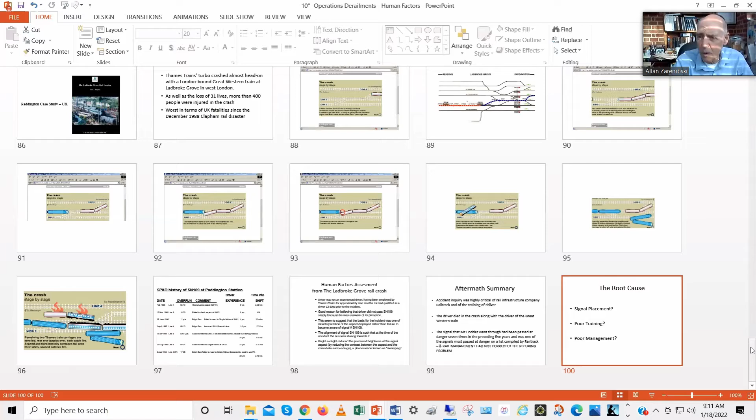Although this was a classic human factors problem, which was the driver on the cell phone, just the same, it has a well-defined engineering behavior to it.

So let's see if we can get this going. And that's what I was afraid of. For some reason, when I do it this way, it doesn't let me put a marker on here. So let me just stop sharing and come back. Huh. Oh, there it is.

Okay, so we're going to start talking about human factors type accidents. Human factors accidents include a whole slew of activities, including drug and alcohol, incapacitation due to injury or illness, literally the classic heart attack. In the metro world, we have a dead man switch, designed to act if something happens. We have alerters in the railway system, and now in the modern world we have positive train control and train control systems, which prevent some of these, but not all, depending on where and how you're working.

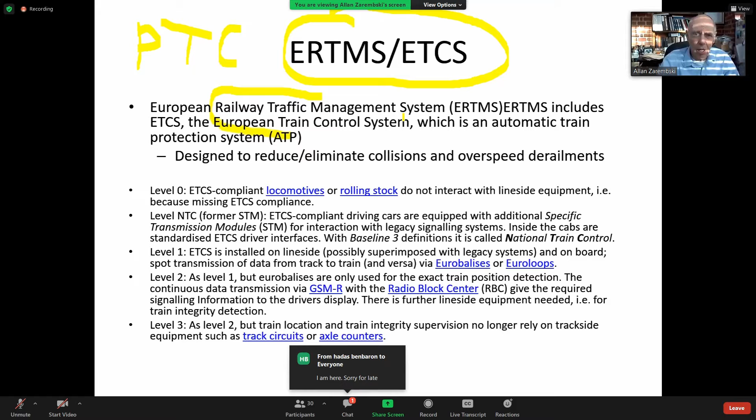In the UIC world, or at least in the European world, it's called European Rail Traffic Management System, and more specifically, the European Train Control System, the ETCS, which I believe Israel Railways is introducing into quite a few of its lines, at least at some level. And metros often have a system that's called an ATS, or an automatic train stop system, which is a little bit different technically from either a positive train control or an ETCS type of system.

But they're all designed theoretically to stop the train if the train is going too fast, if the train goes past the red signal, if there are certain clearly well-defined criteria that are exceeded. And for the most part, they work well, but they don't work 100%. Okay, just a quick refresher on ETCS.

ETCS really has multiple levels, starting with level 0, where you basically don't have any technology associated with the interface between wayside equipment and the locomotives or the locomotive drivers. And then ETCS level 1 is where you start having some line side equipment, some wayside equipment, some signaling type of systems that provide information back to the train driver and back. Usually level 2 already is where you start imposing an automatic stopping of the train.

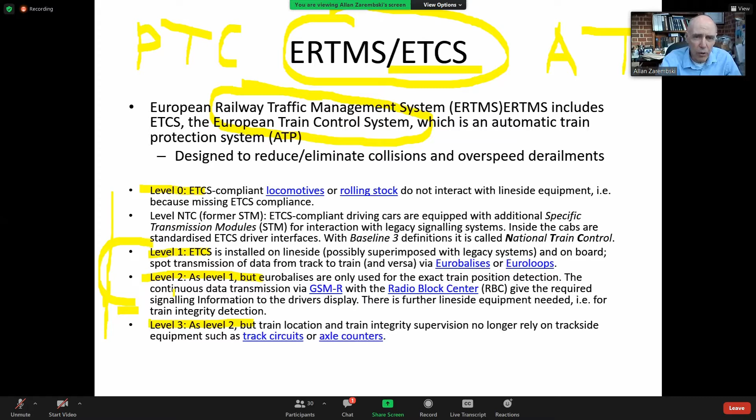Okay. So let me give you a couple of examples of some accidents. I want to sort of set the stage here to discuss some of these accidents. Now, again, some of these accidents you'll see are pre-positive train control, ETCS type technology, and some of them are post-positive train control technology. And we'll talk a little bit about the positive train control, ETCS type of technology, which is designed to stop trains from overspeed.

So, for example, the Spanish accident that we saw before, if a proper ETCS or PTC or ATS type of system was in place, it would have detected the overspeed, even though the driver wasn't paying attention, and would have automatically slowed the train or even stopped the train before it went into that curve. So that's the kind of technology that we're moving towards to get us away from the driver, because when there's a driver who's controlling the train, we know there's a potential for accidents to happen.

Okay. So this is a 2014 German accident. By the way, I've sort of culled my presentation, got rid of a lot of the American accidents and put a much larger share of European accidents in here, just so that we don't constantly point to the Americans and say, well, the Americans are crazy anyway. They don't do a good job of running their trains.

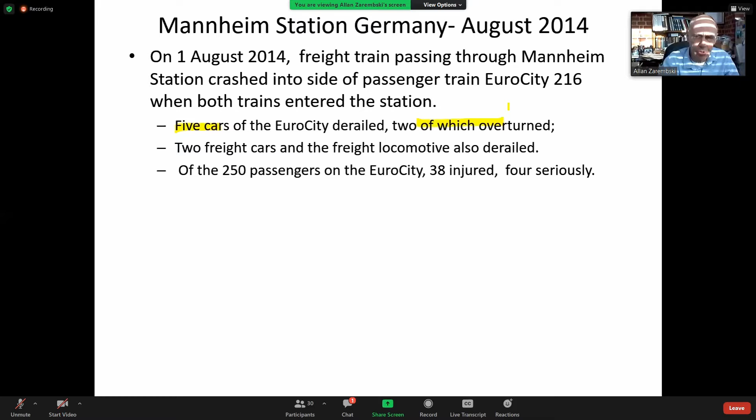And by the way, this is not an uncommon characteristic for these kinds of accidents, where the driver gets confused about where he is. And that's not confined to railroads as well, as I'll show you a couple of later. There have been some metro accidents and some commuter accidents where the driver has sort of lost his bearing, has lost his location.

And so he, for example, didn't know there was a curve coming up, or didn't know there was a red signal coming up. In this particular case, he was expecting the signal to be on the left-hand side because he thought he was somewhere else, instead of the signal being on the right-hand side. So he doesn't look at it.

So in this particular scenario, since this is Germany, there was, in fact, a train control system in place called a PZB safety system, which is an automatic stop system. So the PZB system is a system where if you pass a red light, it basically forces the train to stop, and it did, and forced the train to stop. So what happened here? The train stopped.

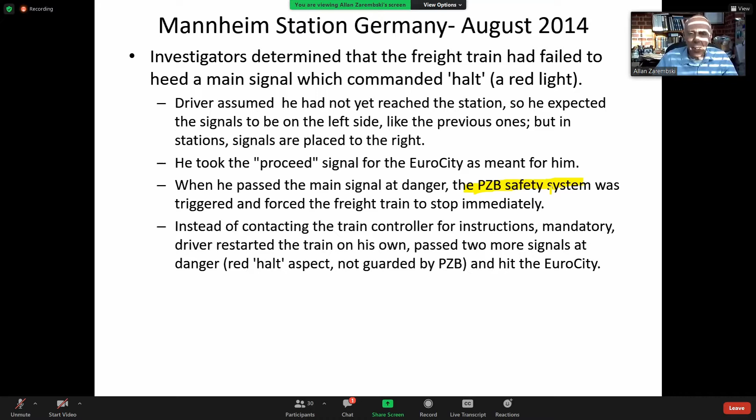So the PZB system was one of the first, an earlier generation ATS, automatic train stop system. Sometimes you also see this called ATC, which is automatic train control.

By the way, does everybody see the yellow here, or do I need to switch color? Hopefully you can all see the yellow. Yes, we see. Very good.

Okay, so in all of these types of systems, a lot of these are designed around passing a signal, and the German PZB system is an example of this. So you pass a signal, it sets off an alarm when the driver is getting to the red signal, and then it just applies the brakes automatically. So it's in general a good system, but in this particular case, once he was stopped, the driver was able to restart.

And by the way, a lot of the positive train control or ETCS systems have that feature where the driver, after he stops, can restart, he can override the signal. And there are a couple of reasons for that. Sometimes the driver needs a special code to do that. But I've been in the cab of a PTC locomotive, positive train control locomotive, the higher generation ones, where the driver can restart and move and restart and move. Sometimes he goes for a shorter distance, sometimes for a longer distance, depending on how the system's designed.

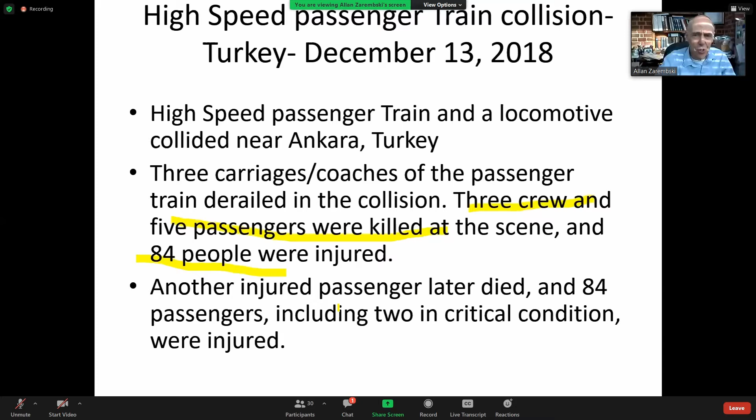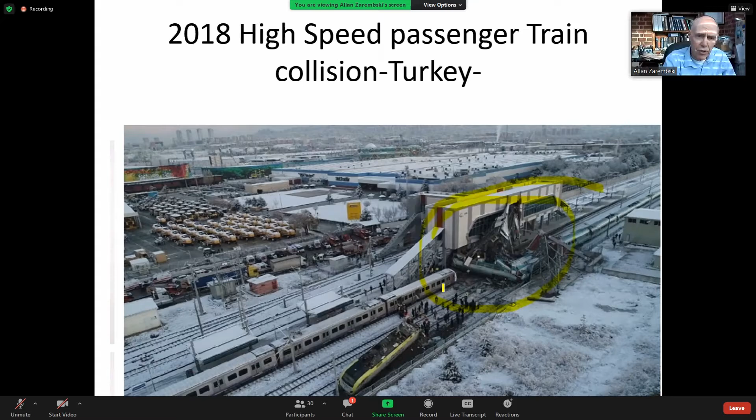This was a straight head-on collision. What happened is that there was a locomotive coming back doing track inspection, and the locomotive was actually on the right track, but the high-speed train, which in this particular case was going about 80, 90 kilometers per hour, was on the wrong track. He was going in the opposite direction to the inspection locomotive, and he caused a head-on collision.

So what happened here? The railway line was open to traffic before the train protection system was fully operational. I will show you that's happened a couple of times. There are one or two other examples that I have along the way here where exactly that happened.

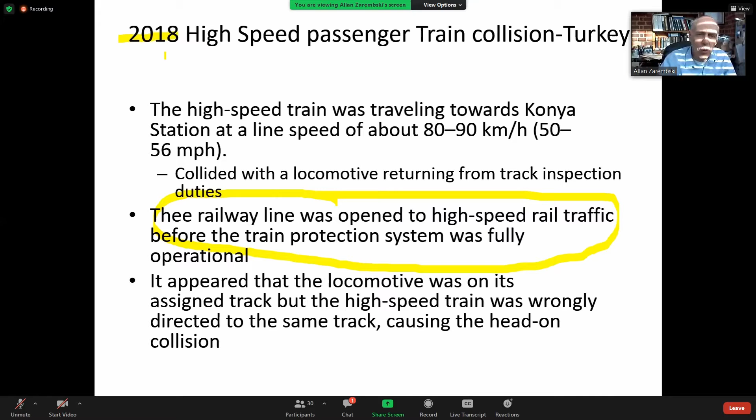Either they thought the train protection system was fully operational, it turned out it wasn't, or they knew it wasn't fully operational, but because of political or scheduling or other reasons, they decided to go ahead and start operations. And so in this particular case, in this Turkey collision, again, this is recent, this is 2018. This is only a couple of years ago. The train protection system was not fully operational.

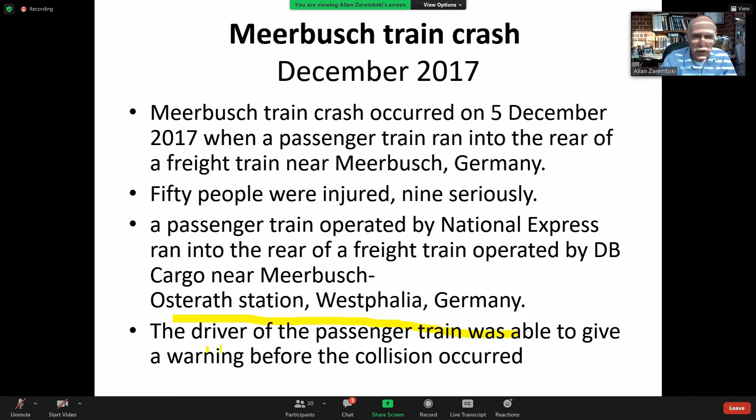Okay, here's a German 2017 example. In Meerbusch, Germany, a passenger train slammed into the rear of a freight train. 50 people were injured, 9 seriously. In this particular case, the driver of the passenger train was able to give a warning before the collision occurred, but the train didn't stop.

Okay, so the freight train again was on its proper track. What they think happened here was that the passenger train was given permission to pass a stop signal. So he should have gone at very low speed, 40 kilometers per hour, so that he should be able to stop within sight distance. But in this particular case, the rear of the freight train was not well illuminated. There was poor visibility, and he passed the signal.

So again, this is the situation where you can have a positive train control or an ETCS, European Train Control System, or an ATS system in place. But most of these systems, and for good reason, because there are some times where you really do need to pass a red signal. What happens if a red signal is faulty? What happens if the red signal is not working properly and the train has to go past? So you have to be able to override the red signal and not automatically be stopped, because there are situations where it happens.

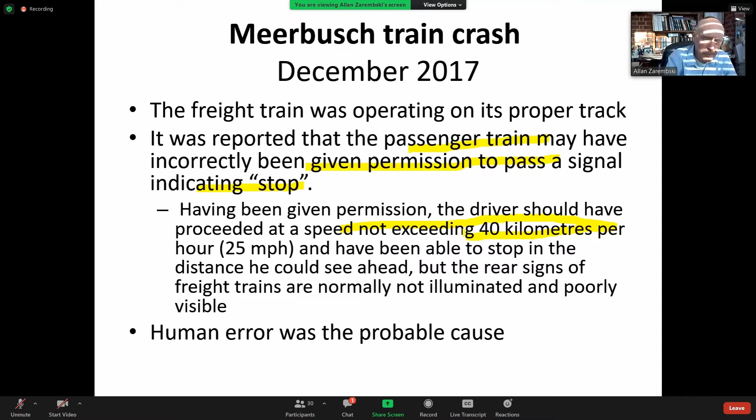And again, I've been on locomotives with PTC, with positive train control, so I know you have the ability to override a stop signal with certain codes or certain restrictions. So here, the passenger train was given permission to pass the signal, and so although there was a train control system in place, he did go past it. But the driver, instead of going at a speed where he can stop, because visibility was poor and because the freight train was not well illuminated ahead of him, he didn't really see it and he plowed into the rear of the train. Again, human error in the era of train control systems.

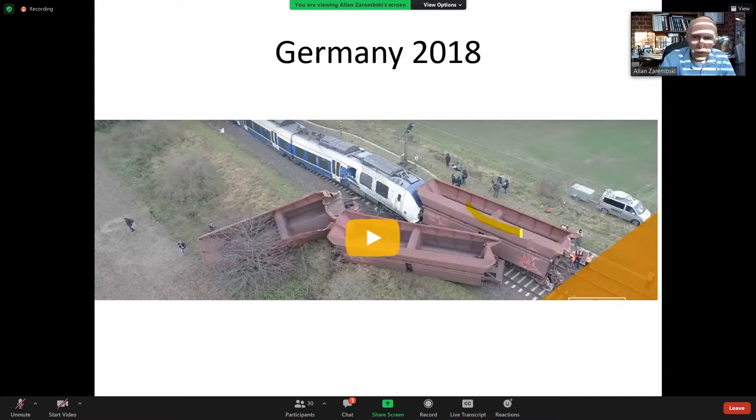And here you can see the picture of the train. There you can see the passenger train hitting the back of an empty wagon. You can see it derailed a bunch of freight wagons.

This is that Spanish high-speed train derailment that I just showed you. We just showed you the video, so I'm not going to replay it. That wheel climb one. This is 2013. This is before there was a train control system in place. So this was a really nasty accident. 80 people died. I mean, this was one of the worst accidents in modern times. The German broken wheel accident I showed you, we talked about last week, was worse. About 102, 103 people died, but that was, I think, in 1999. So this was 14 years after that.

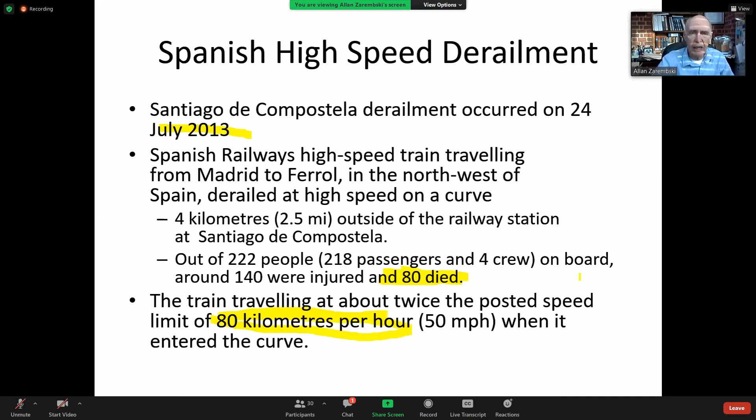Okay, so the posted speed for the curve was about 80 kilometers per hour. The train was traveling at about 160 kilometers per hour. This was a high-speed rail operation, and we showed you the wheel climb. We talked about that one already. Here's another view of the accident scene. Again, when you see damage like this, it's not good. So 80 people killed here. Another view of the crash site.

So again, this should be preventable with modern technology. You can see the different control systems: automatic train protection or advanced train control, ATC, ATS, automatic train stop, positive train control, European train control system. These are all the ETCS.

Hold on a second. I'm gonna take a 2-second break. Somebody just rang my doorbell. Let's see what happened. Thank you. Yes, thank you.

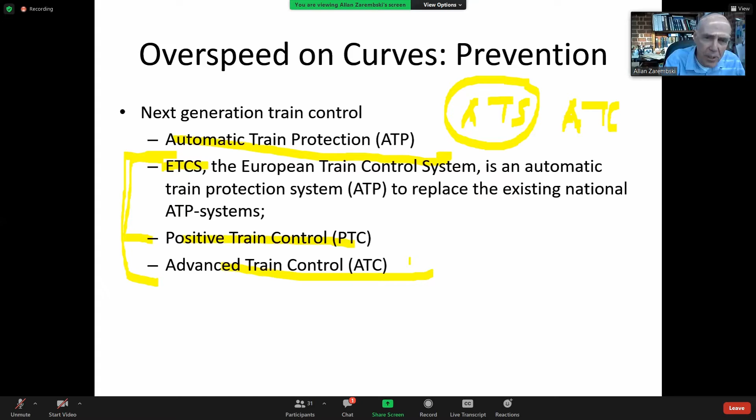It works very similar. Automatic train stops are triggered when you usually go past a red signal. The automatic train stops and some of the automatic train control systems are more really geared towards passing a red signal, not so much as going to overspeed. The newer generation systems, the ETCS, the PTC, the advanced train control, they also look at speed and take into account speed. So that, again, as I said, the Spanish type of accident should have been, if there was an ETCS or a PTC system in place, that should have been prevented.

So again, the driver of that Spanish train said he lost concentration, but when they checked his telephone records, they saw that he was actually on the telephone, and he was also charged with homicide by professional recklessness and actually went to jail.

There was an Amtrak derailment in 2015, which was very, very similar to the Spanish accident as well, except the driver wasn't on the phone per se. This was a case where the driver entered a curve. There was a curve that had an 80 km/h speed restriction, and he entered the curve at about 164 km/h. So again, like the Spanish case, it was double the speed. In this case, only, and I say that very, very facetiously, only 8 people were killed and 200 people injured. So again, it was a nasty one.

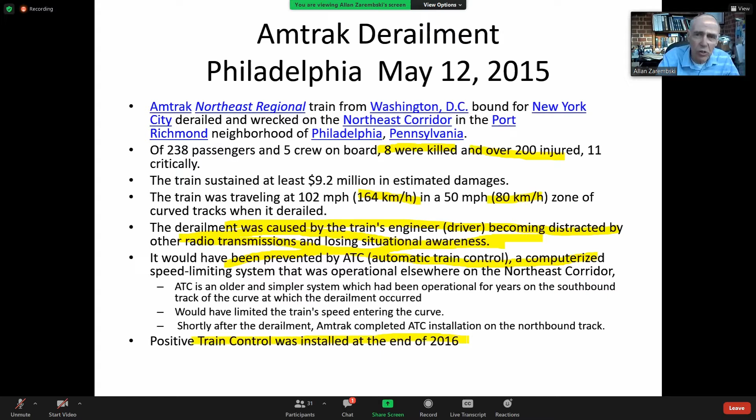And there have been other accidents, and in fact, I got another one I'll show you in a few moments, also an Amtrak accident, but in the state of Washington rather than near Washington, D.C., where, again, the same thing happened. He lost situational awareness. He didn't know where he was. Again, the frustrating part about this particular operation is it would have been prevented by an automatic train control system. Amtrak had automatic train control systems on most of their railroads, but this particular location didn't have it in place. So in this particular case, the system was not even installed until literally a year later in 2016.

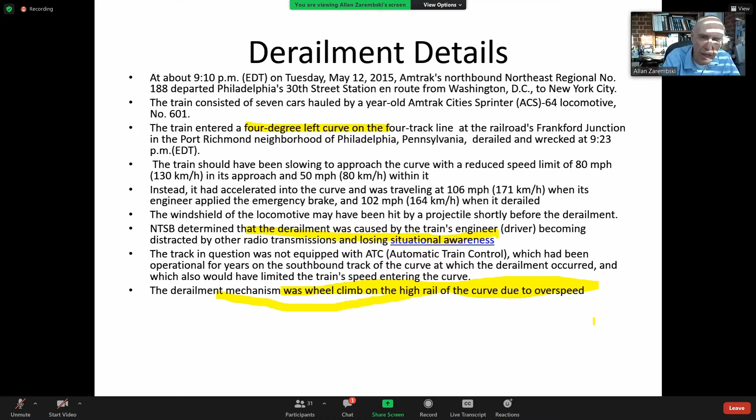So I'm not going to go through the details of it. A lot of things were happening. The driver said he thought somebody actually may have thrown something against the windshield and distracted him. But he basically lost his location. He didn't know where he was. So he entered this 4-degree curve at double the speed, 160 kilometers per hour versus 80 kilometers per hour. And again, by the way, derailment mechanism was wheel climb. When you have an overspeed situation, that kind of wheel climb with high L over V is usually the actual engineering mechanism as to why it derails. And, again, pictures.

Okay, here's an interesting accident. This is a metro accident. So some sort of automatic train control was there. This was, again, very recent. This is 2019, so this was only a couple of years ago. And this was in Romania, in Bucharest. So a metro unit failed to stop inside a depot and overshot the buffers. There were buffers at the end of the track. He was going fast enough that he crashed through the buffers.

There was an accident in New Jersey, New Jersey Transit, a number of years ago that was very similar, where the automatic train stop didn't engage properly, and the train was going fast enough that it overran. The buffers are basically mechanical blocks at the end of the track, designed so that you don't go through the track. But when you're going fast enough, there's nothing going to stop a moving train.

So what happened here was this was in January, so it was very cold weather. So because it was cold and icy, instead of stabling the metro unit outside the depot, they wanted to bring it inside the depot. So the train was being actually pushed by a shunter locomotive. So this metro used shunter locomotives inside of depots.

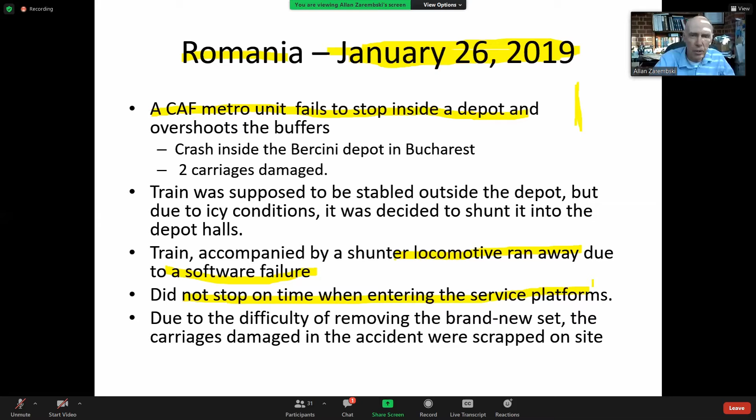There's an expression in English called Murphy's Law, which is sort of anything that can go wrong will go wrong, and we see that in the railway all the time. So there was a software failure. The ATCS didn't work properly. So the train was overspeed. It overran the buffers, and it actually crashed into the depot.

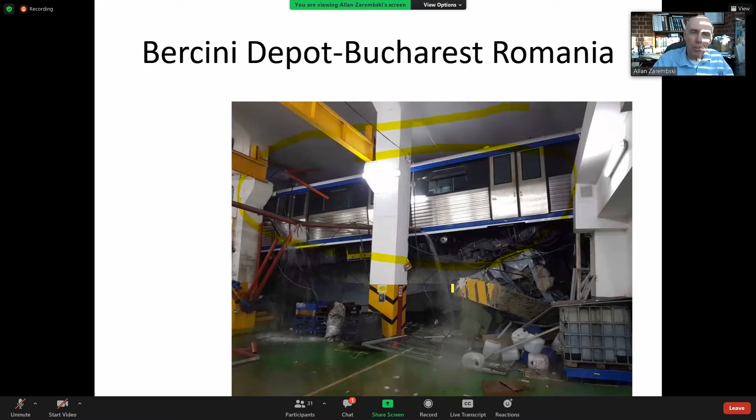And here's a picture which I find fascinating. So you can see the metro car inside the building, somewhat higher up than where it should be, because there were no tracks in there that it was supposed to go to. You can see this is just a hall within the depot where the metro vehicle is located. Okay.

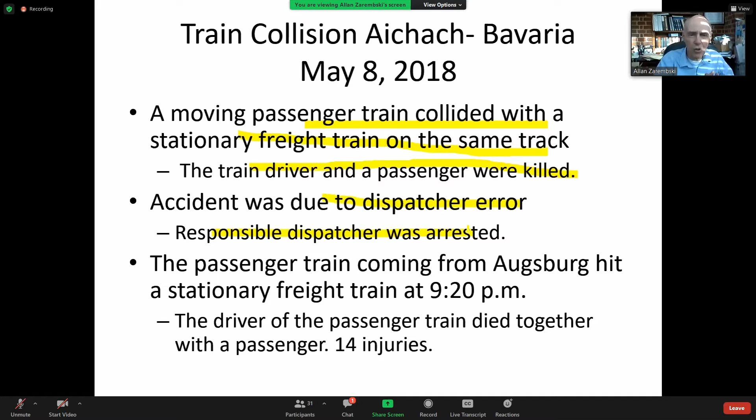Another German accident, Bavaria 2018: a moving passenger train collided with a stationary freight train. The train driver and a passenger from the passenger train were killed. Dispatcher error in this particular case. The dispatcher allowed the train to go forward. Again, you can see the collision.

This is an older accident. This is pre-PTC. So I'm just going to briefly show it because I want you to understand some of the engineering issues behind it and some of the human factors issues as well. So this is a Burlington Northern Santa Fe, a U.S. freight train. It's actually a 14,000-ton coal train that collided with the rear end of a standing maintenance-of-way train. A maintenance-of-way train is a train that moves maintenance gangs and maintenance gang equipment from site to site.

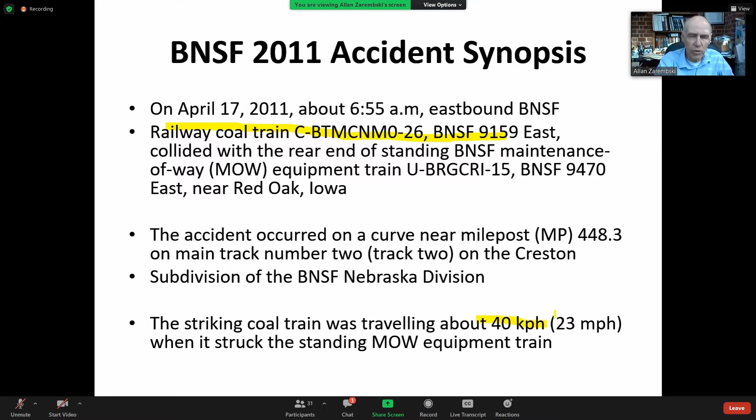So the maintenance train was standing still and the coal train hit it in the rear. It hit it at about 40 kilometers per hour, but it was a very heavy train. So let me just show you the kind of damage of that impact. This was the front of the collision. So the collision was going that way. This is the front of the coal train that hit. This is the back of the maintenance-of-way train. And you can see how it was just accordioned up here.

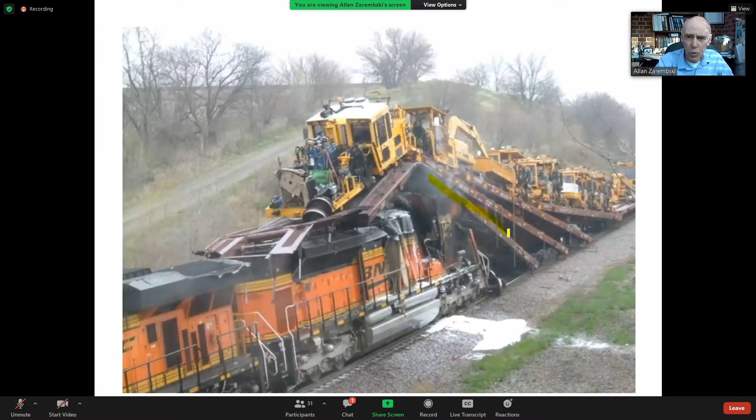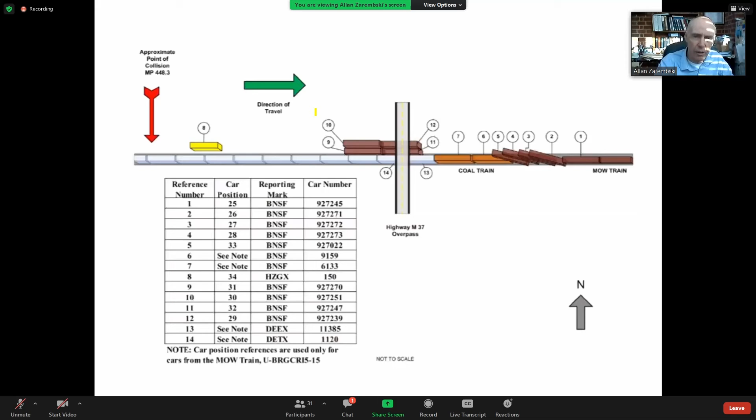Take a look here. You can see 1, 2, 3, 4 different wagons all crushed into each other. So this was an accident at 40 kilometers per hour. Yet because it was such a heavy train, it generated that kind of damage. Again, you can see the kind of damage involved. Derailment diagram, I'm not going to go into details.

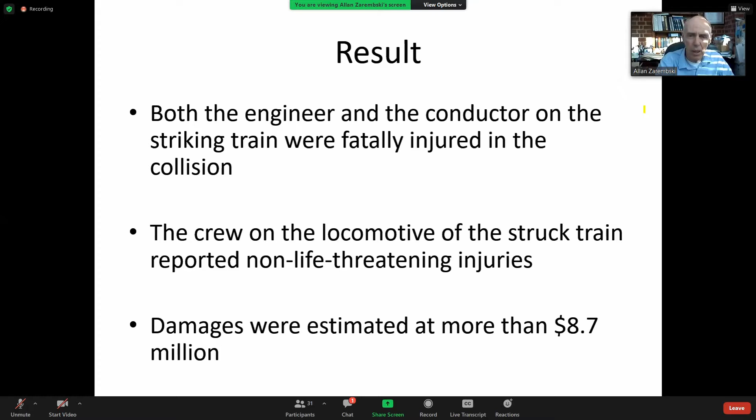The engineer, the 2 people in the cab of the striking freight train, were killed. The locomotive of the train that was struck was way up here. So while there were some injuries because of the damage, there were no fatalities on their part. This was about a $9 million collision. So this is a nasty collision.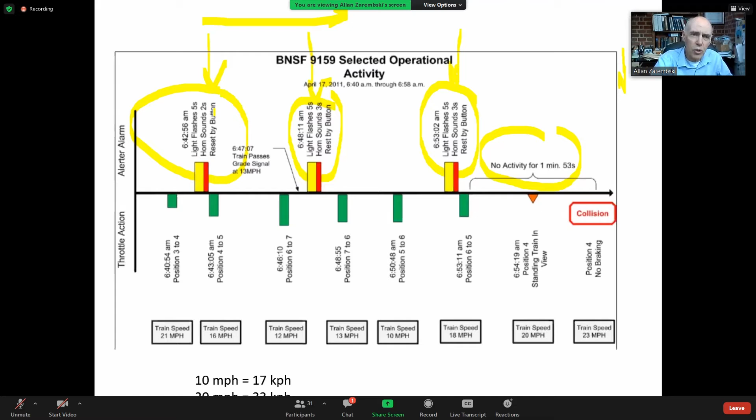Both the driver and the conductor. There were 2 people in the crew. They were both falling asleep. So this was 6:40 in the morning. You had an issue of crew fatigue. This was before positive train control, which would have stopped this particular problem. There was also an issue of the crashworthiness of the locomotive cab.

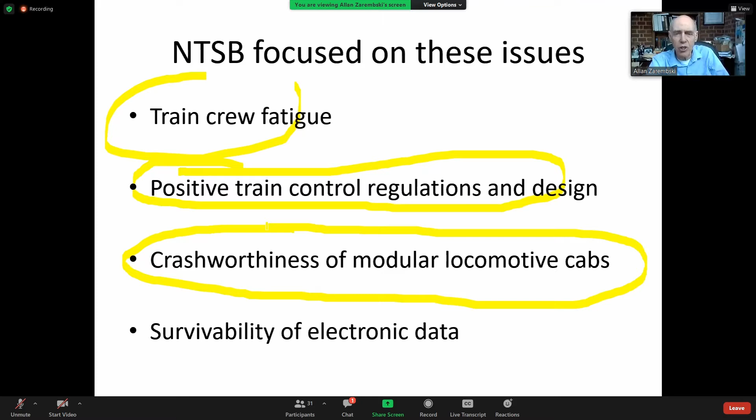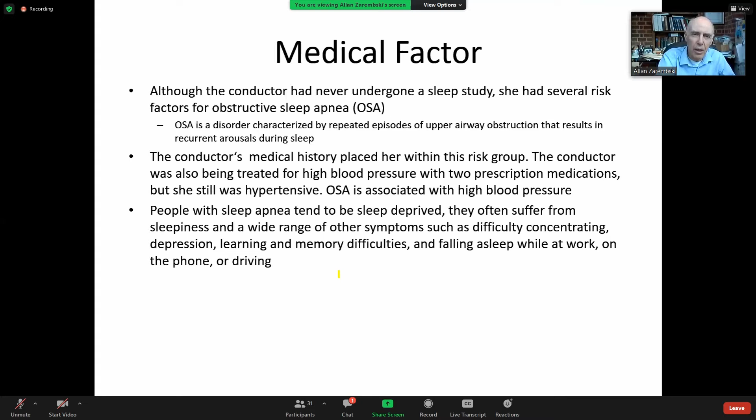Remember, we talked about crashworthiness when it came to wagon design. There's also a crashworthiness issue when it comes to locomotive design to make sure that you have a crumple zone, etc. So in this particular case, the crew had fallen asleep. And it turns out that one of the crew members was diagnosed with something called sleep apnea, which is a tendency for people to not sleep well at night and then fall asleep during the day. And so this was an issue.

Okay. I'm going to quickly go through the Chase, Maryland 1987 accident, only because it was a classical accident that led to the introduction of drug and alcohol testing. This was a collision that happened in the Northeast Corridor, where an Amtrak train crashed into a set of locomotives that were running on the corridor. They had run a red light because the driver and the other crew member were taking marijuana. So they were on drugs. This was pre-drug testing. Again, this is well before positive train control.

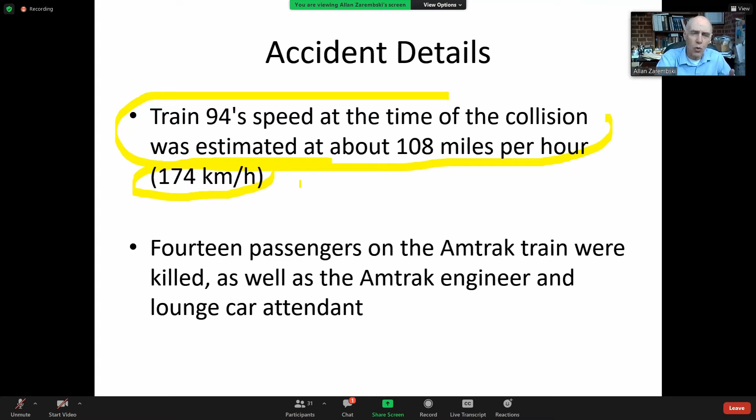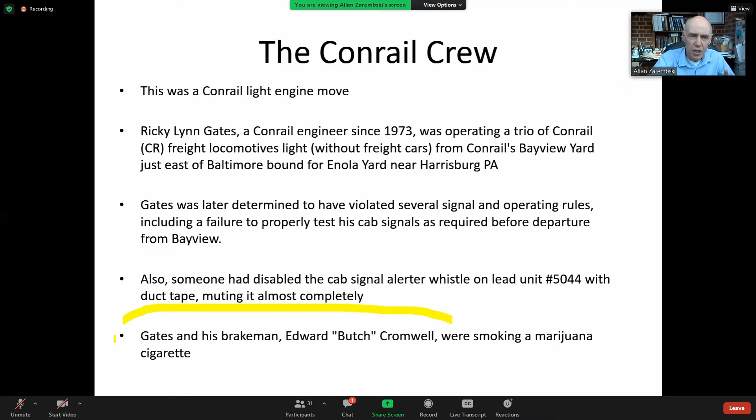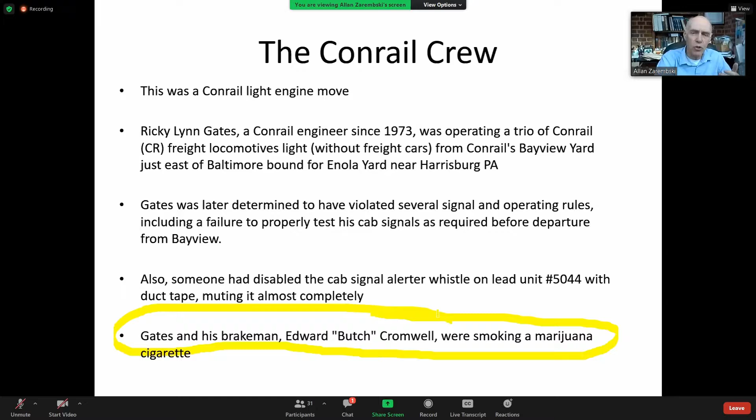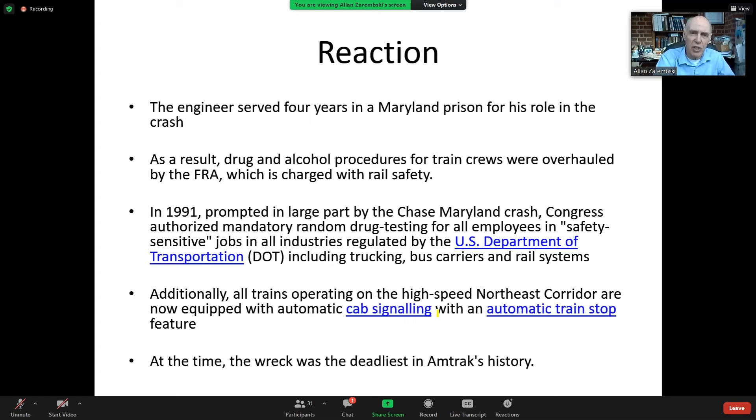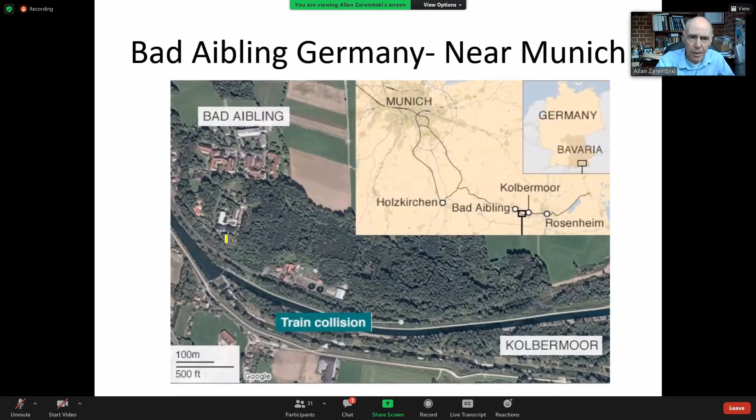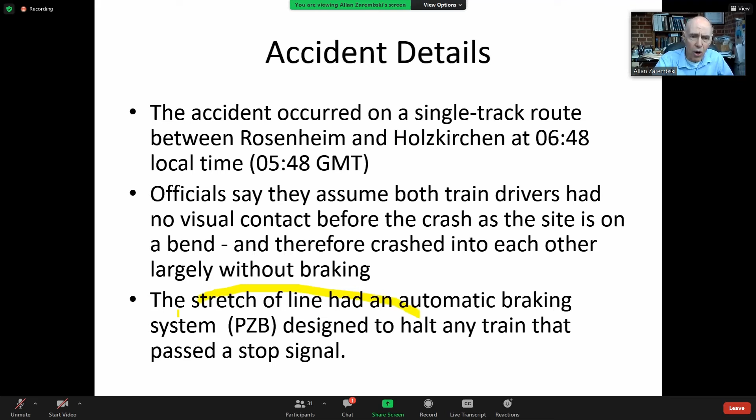Okay, another German accident, head-on collision, 2016. 12 people died, 85 people injured. In this particular case, again, you can see the head-on collision. This is not far from Munich, Germany. Okay. Because you can see the accident was on a curve. So the problem with a curve is that nobody can see each other, so there was no warning whatsoever. There was an automatic braking system on this line. The problem is with nobody passed. So what happens is that this is again the PZB system.

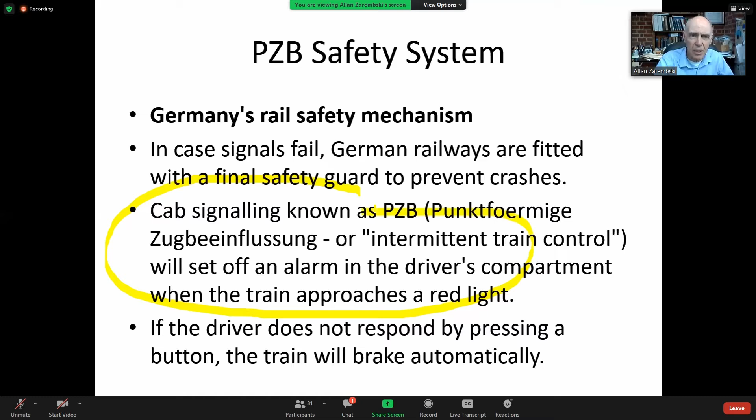In this particular case, the train dispatcher was at fault. So in this particular case, instead of the cab system activating the system, the train dispatcher basically provided an override to the automatic train control system. So in this particular one, the driver basically got a signal from the dispatcher saying, okay to pass. The dispatcher overrode the automatic train stop himself.

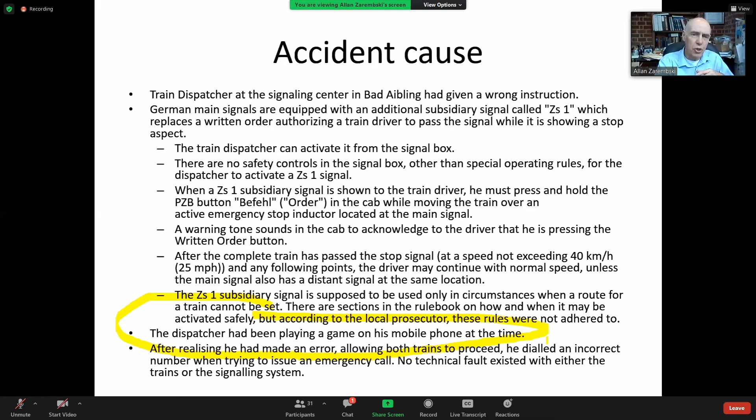And the dispatcher at that time was playing a game on his mobile phone. So he wasn't paying attention to the situation. He didn't realize there was another train coming in the opposite direction. But he realized his error, and then just to make life more difficult, he basically dialed the wrong emergency number. And so he overrode the signal because he was playing games on his phone, and then he dialed the incorrect emergency number, and so the collision happened.

He gave incorrect orders to both trains. He overrode the automatic train stop because he was distracted. And then when he tried to send an emergency code to the train, he basically entered the wrong combination on his computer.

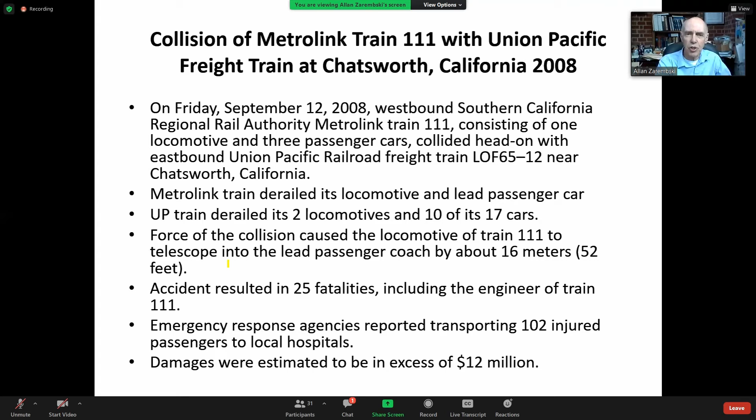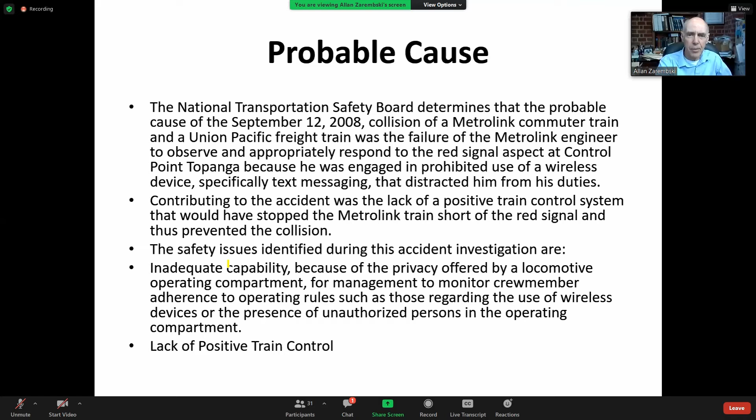Okay, this is a 2008 accident. I'm not going to spend a lot of time on it. This was just a driver on the cell phone again. Drivers on cell phones are one of the modern issues here. In this particular case, let me see if I have the details of it.

In this particular case, the driver who was on duty between 6 a.m. and 4 p.m. on that day sent or received 95 text messages. And during that shift that he was actually operating at the accident, he actually sent 21 text messages, received 21 text messages, and made 4 phone calls, in the morning and afternoon, on the day of the accident.

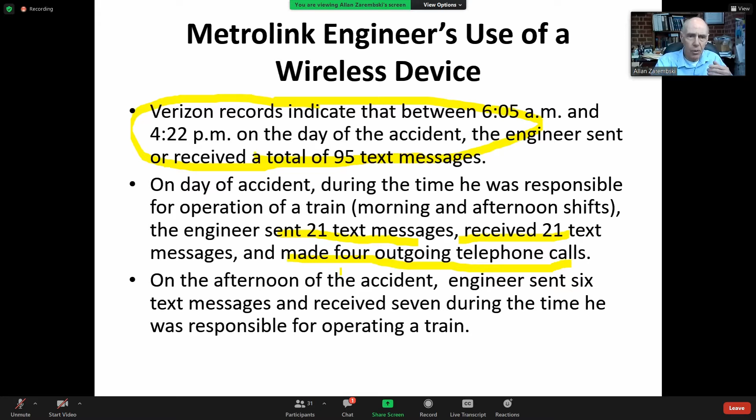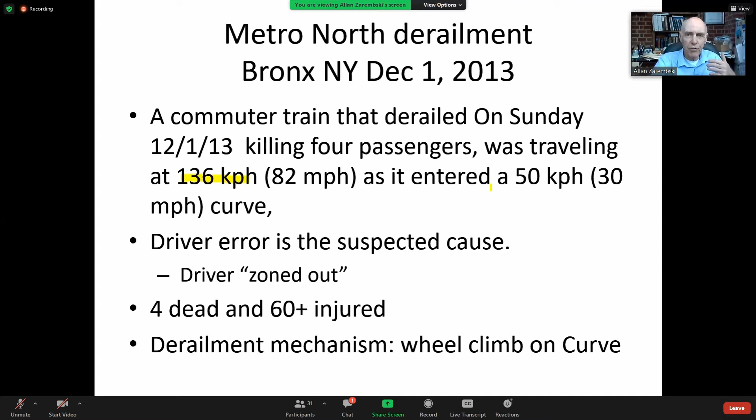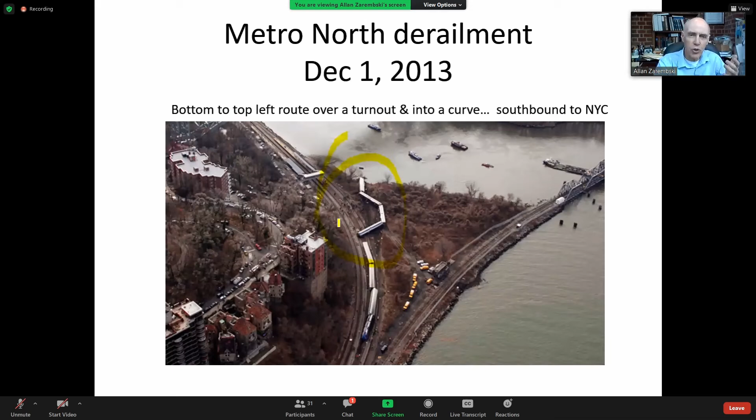Okay, this is another overspeed accident due to the driver losing track of where he was. Again, this was pre-positive train control. This was a 132-kilometer operation. The train went into a curve that was designed for 50 kilometers per hour. He went into it at 136 kilometers per hour. You can see the curve. You can see another wheel climb accident, but again, pre-positive train control; ETCS or PTC should be able to control that.

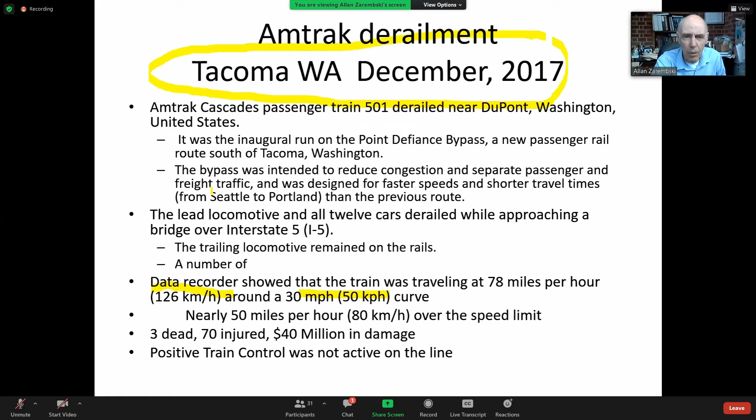So he came into a curve that was designed for 50 kilometers per hour, and he came in at 126 kilometers per hour. And just because this is my beautiful television footage, this is the Amtrak train. This is the lead. He was going in that direction. So there was a locomotive at each end. He derailed on this curve, dropped onto the highway, and as you can see from this picture, actually crushed several trucks and automobiles on the highway below. So there were about 3 dead, 70 injured, and a whole bunch of automobiles damaged.

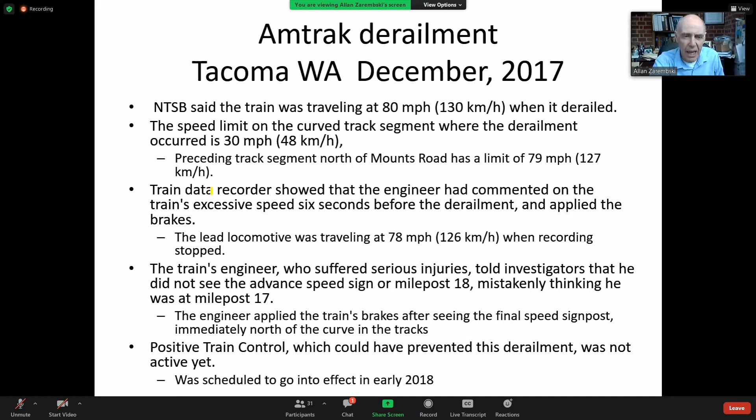Again, this was a case where the operation started before positive train control was initiated. Positive train control was available on the other side of this line and on the earlier side of the line, but this particular bypass did not have positive train control installed yet. And they opened up the line, I think, for political reasons, and they had this accident. Again, you can see how many rail vehicles fell off onto the highway.

Excuse me, Professor. What does it mean, driver zoned out? Driver zoned out means that he basically wasn't paying attention. He was mentally distracted. His mind was elsewhere. And very often when that happens, the driver loses his location, which was exactly the case here. There were signs saying there was a curve coming. There were signs saying to slow down. But he lost his situational awareness. He didn't see the signs. He was mentally distracted, and he went into the curve at more than double, in this case about 2.5 times, the permitted speed in the curve.

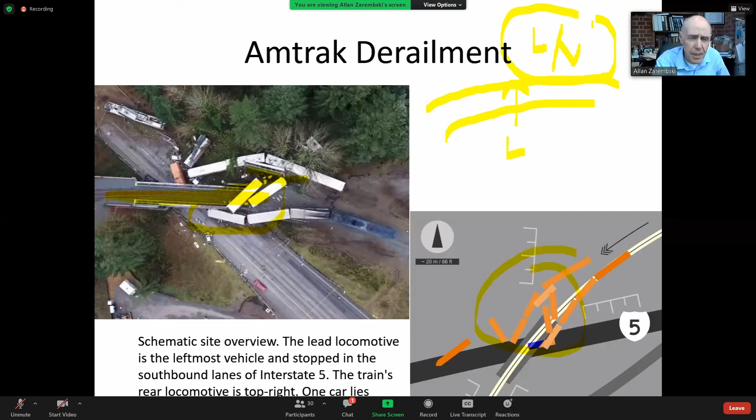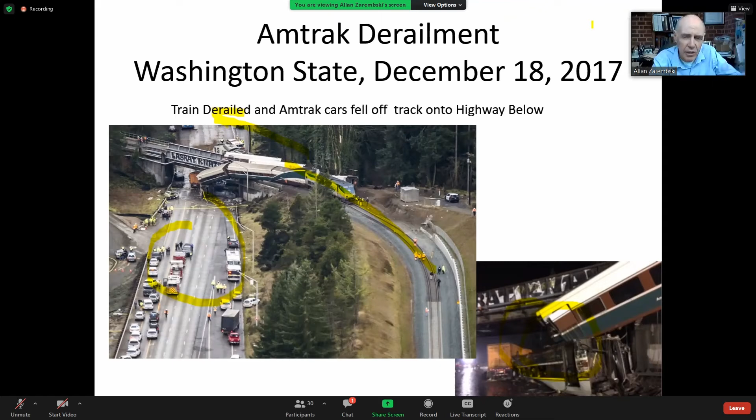So I always warn people, don't rely exclusively on train control systems, because they don't always work the best. I mean, they work, and they'll prevent this particular accident where it was going 126 kilometers per hour in a curve designed for 50 kilometers per hour. This would have been prevented. The Spanish accident would have been prevented. The Amtrak Philadelphia accident would have been prevented.

Okay. All you metro people have so far been sitting there listening: well, these are railroad problems, not metro problems. So here is a commuter rail operation in Chicago that was running on city track inside Chicago. In this particular case, you can see there was a wheel climb in a switch. Do I have a picture of it? Yes, here. You can see this is a very complex interlocking. So again, it's very, very easy to lose track of where you are in this particular switch.

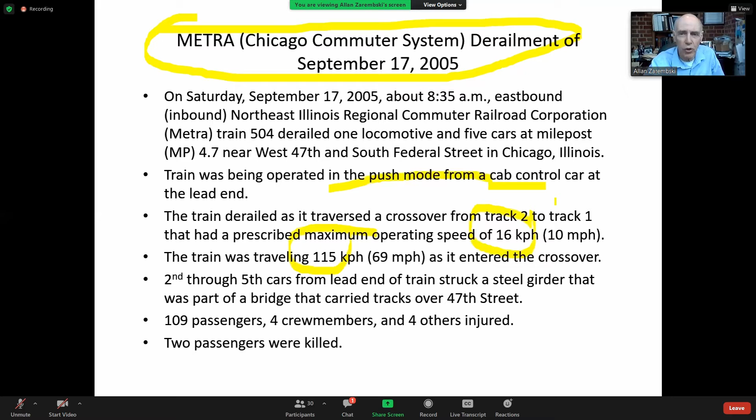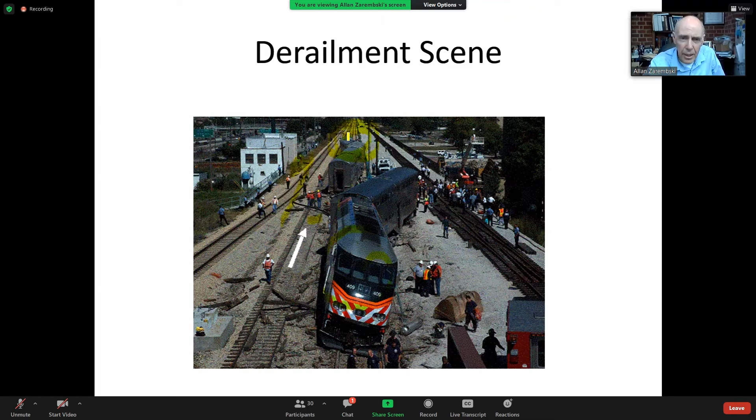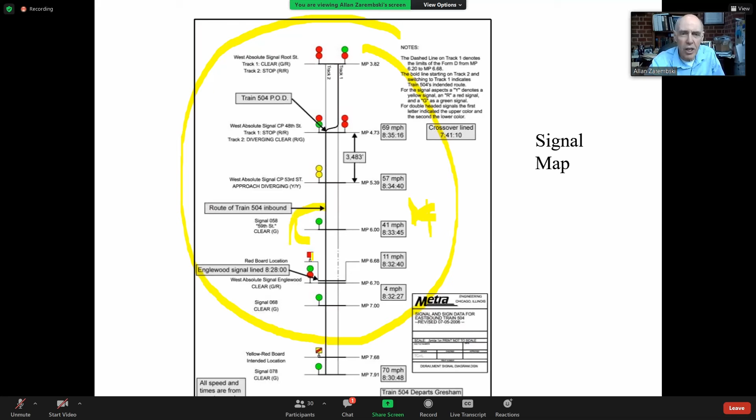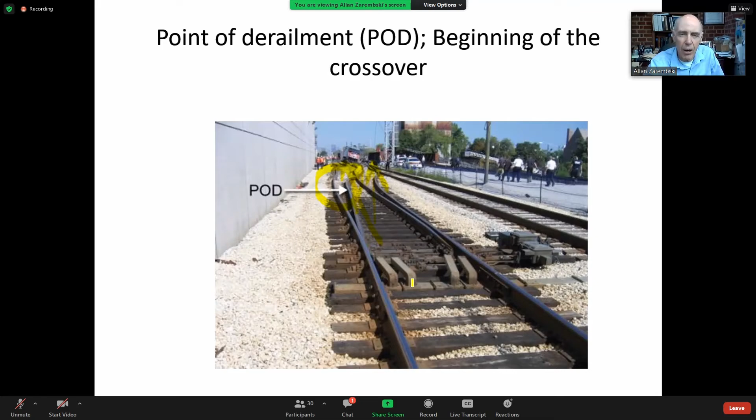Now, so what happened here? They were actually filming along the right-of-way. Right around over here, there was a crew making a training film for the railroad. And the engineer was distracted and lost track of his signals. He actually thought that he was being sent on a clear signal straight ahead, in which case 115 kilometers per hour would have been appropriate. He was totally distracted and didn't notice that he was being sent onto the diverging leg, which had a 16 kilometer per hour speed restriction. And he totally missed that.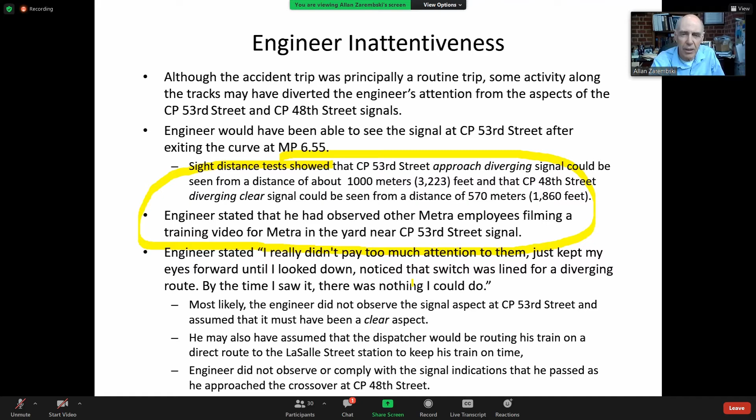So again, would positive train control have prevented that? Actually, it would have. Basically inattentiveness. Okay. The last human factor accident I want to talk about, and then we'll take a break, is a famous British case. It's an old one, but it raises a whole bunch of interesting issues that I want to at least bring to your attention.

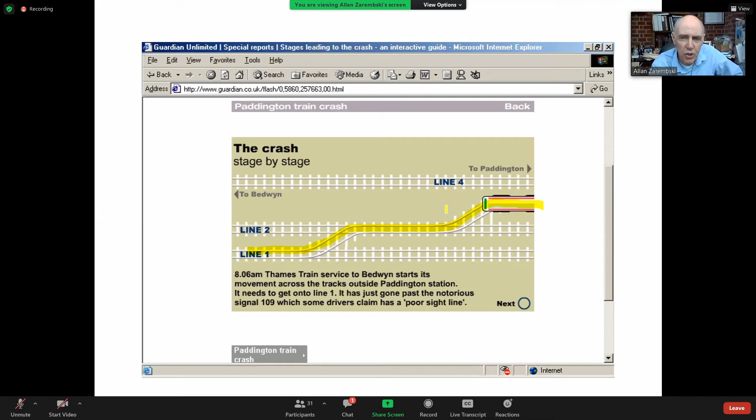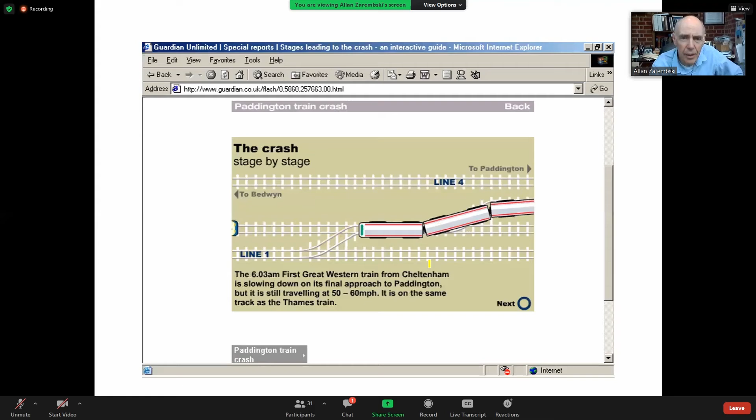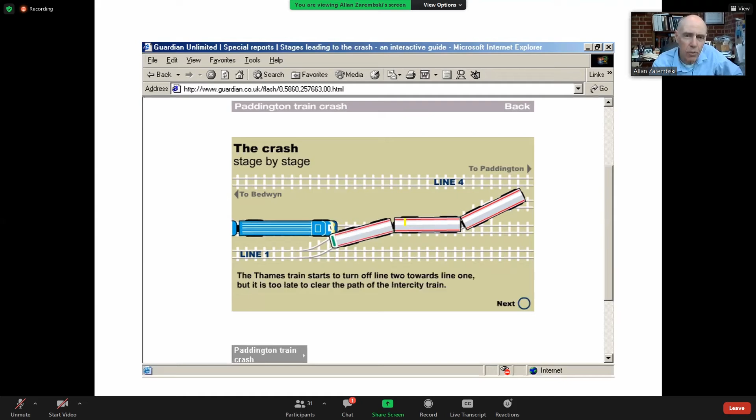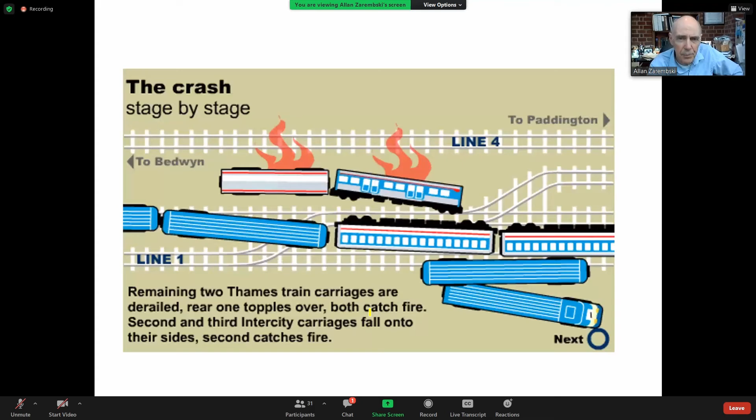So as we watch this accident, you can see the Thames train start. It's supposed to be going over 2 tracks. So it starts moving across the 2 tracks. And then all of a sudden, there is another train that's coming along here. So actually, he had a red signal. He came through. He got hit not quite head on, just off the side. That train got thrown up into the air. The other trains were derailed. 30 people were killed from that particular car. Trains caught on fire, and it was a classical accident.

So in the British system, when you go past a signal improperly, they call it SPAD, or a signal passed at danger. Other railways call it a passed red signal. There is other terminology for it, but the British use this particular term, which you'll see elsewhere in the railroad world, signal passed at danger.

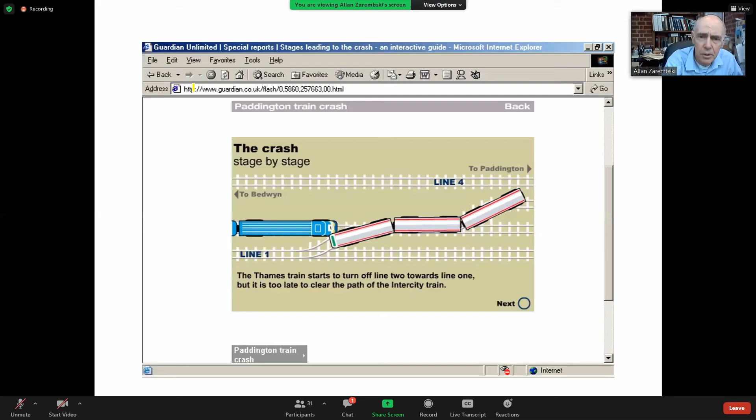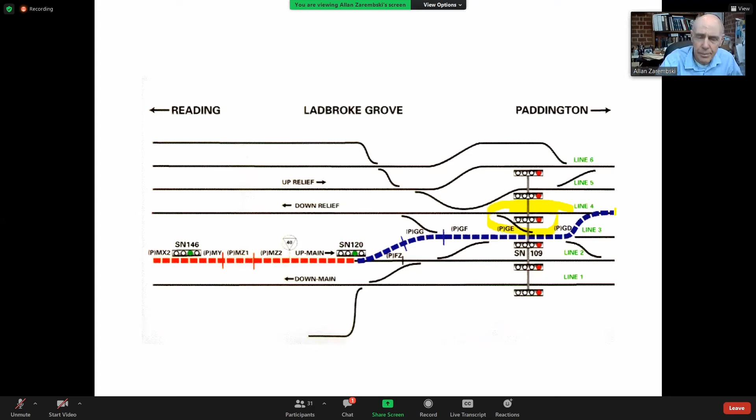Okay, so this particular signal, which controls the operation of this particular train right over there, has a history of failure. Remember that accident was 1999. So this is the 5 years before that accident. Oh, by the way, the driver of the train that passed the signal had just been promoted to operate by himself. So he has less than a year's worth of service, probably of the order of 1 to 2 months. So he's a relatively inexperienced driver, even though he passed his qualification exams.

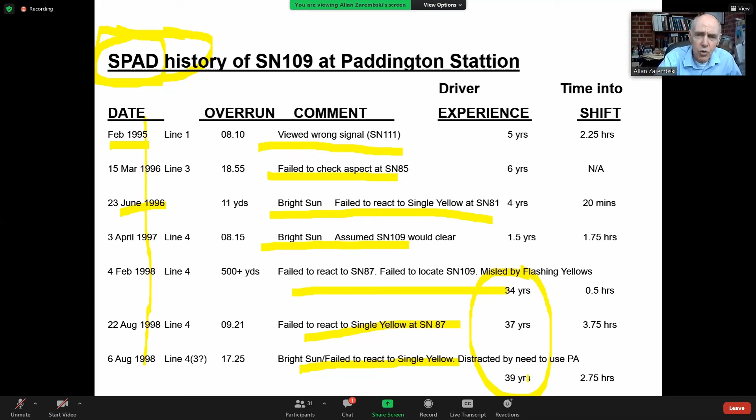And notice in these particular cases, we're talking about very experienced drivers. This driver has 34 years of service. This driver has 37 years experience. This driver has 39 years experience. So there was a big history with this particular signal. In this particular case, the driver was not experienced. He was qualified as a driver 2 weeks before the accident. He passed this particular signal, which has a history of problems.

So again, the sun was shining towards the signal, and bright sunlight changes the brightness of the signal and the ability to detect the color. There's a term called swamping the signal. So in this particular accident, because of its history, there's a real question as to whether that signal should have been corrected previously, repositioned, moved elsewhere. The driver died, so they never really got the exact details of what happened. He's one of the 31 fatalities.

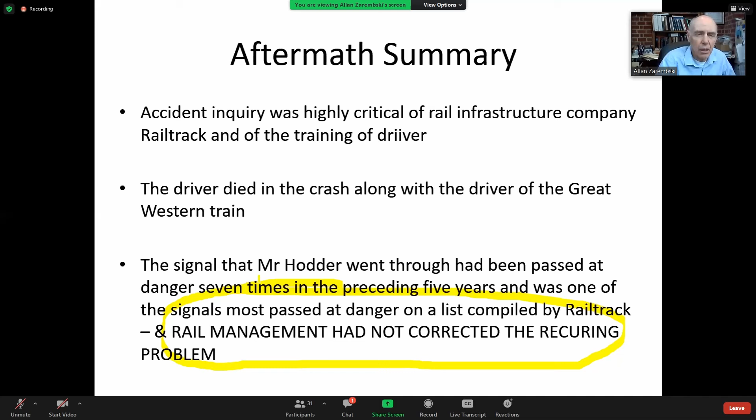But the British, if you recall, have a very strong penchant for dealing with rail management or human factors. They really felt that this was a management or an oversight problem. So when you get to a root cause, clearly what caused the accident was he passed the signal. So was the root cause signal placement, poor training, poor management, all of the above?

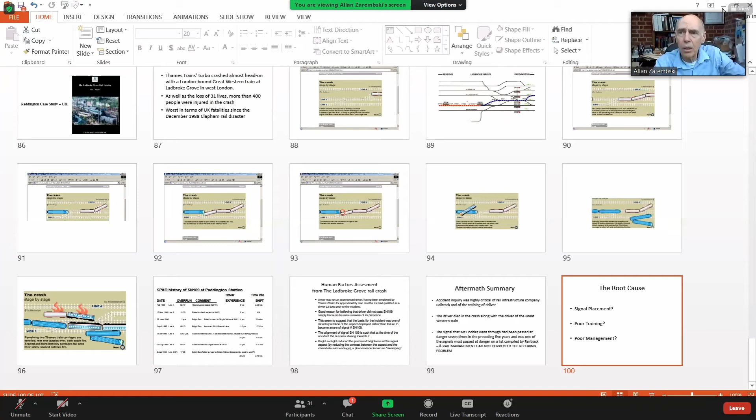Before we take a break, I want to show you 2 videos, and we're going to come back and talk about these videos in the next one, but I want to give you something to think about. So let me share my screen again. Okay, move this down.